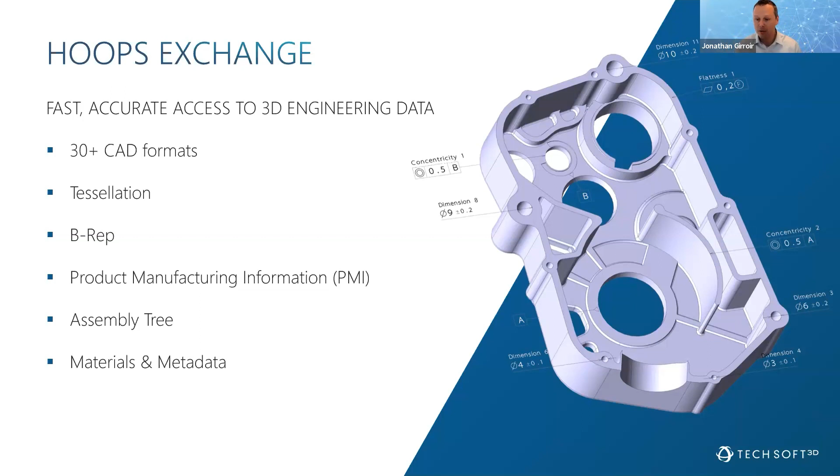So let's dig into that a little bit more, and first talk about what we support when it comes to bringing CAD data into your application. Because now more than ever, if you're providing a solution for 3D printing, your users are going to be getting data from a variety of sources. There is a loss of information when it goes to STL, and some problems can be introduced in that translation. So the closer you can get to that original CAD data, the better.

We support over 30 different file formats, particularly in the engineering space - formats like JT and NX from Siemens, CATIA and SolidWorks from Dassault Systèmes, all of your standards like STEP and IGES, as well as some of your visualization standards like GLTF, U3D, OBJ, and of course we have STL in there as well.

The benefit of using an SDK to read data from a variety of sources is, instead of writing these file readers yourself or interfacing with different SDKs or APIs from different vendors, you really only need to create an integration with one API. So you're creating an integration between your application and Hoops Exchange, and you get all of this data all at once - it's a many to one. You don't have to maintain relationships with other APIs to get the data, nor do you need a copy of, say, CATIA or SolidWorks on your user's machine driving that reader out of that application.

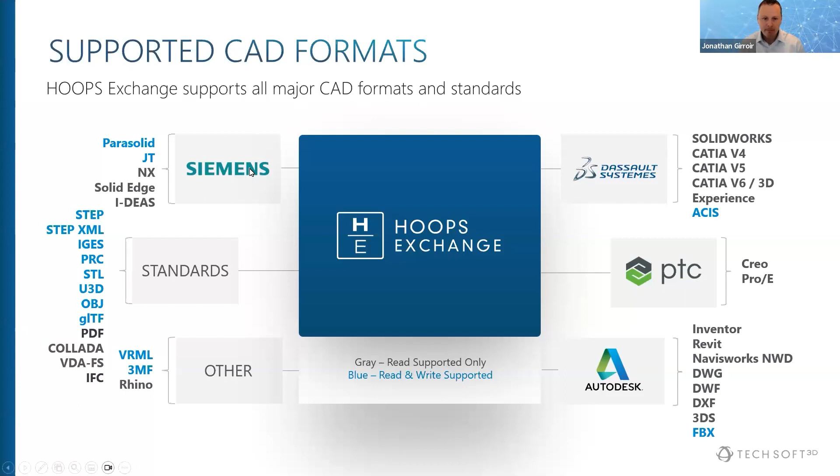So let's dig into some of the different things we provide, particularly for 3D printing. The first is tessellation - many of our workflows are still optimized for triangles. Many of these file formats you just saw have the triangle representation embedded in them, so we can quickly read the triangle data from these different file formats and be able to provide that to you for both visualization and then eventually for outputting to the printer.

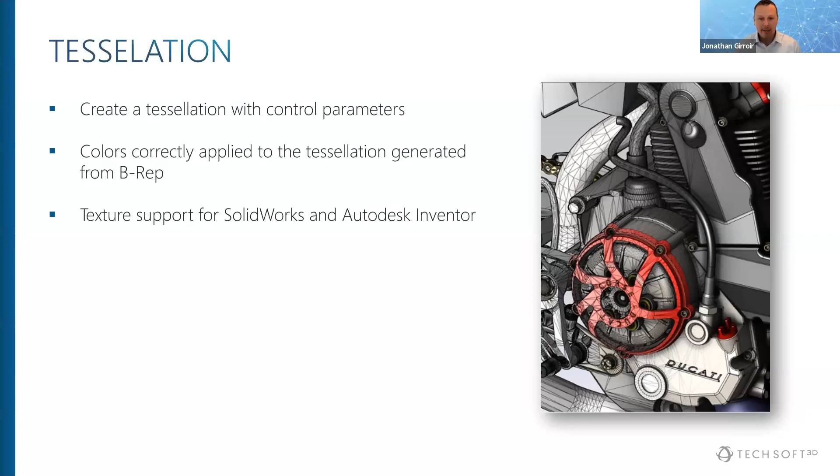However, if there is boundary representation or BREP data available - the mathematical representation of these surfaces - we're able to retessellate either at a much higher level, so you get a much closer tessellation to the surfaces, or at a lower level if you want to simplify the model. We also push to applications like Polygonica that can further help you simplify, fix, and heal your model as well - we'll be talking about that in a minute. As part of this tessellation, we provide a number of other control parameters that allow you to create tessellation specific to your workflow.

We did talk about BREP. So even though many of our workflows are optimized right now for triangles, the future of what we're seeing software being developed for is looking at these actual mathematical surfaces, the BREP surfaces themselves, and being able to print directly from them. Having access to those arcs, curved surfaces, cylinders, cones, spherical surfaces - people are able now to make use of that and make manufacturing decisions off of it. So we do also provide that as part of the API if it's part of the file, from many of these modern CAD files from major vendors like PTC and Dassault.

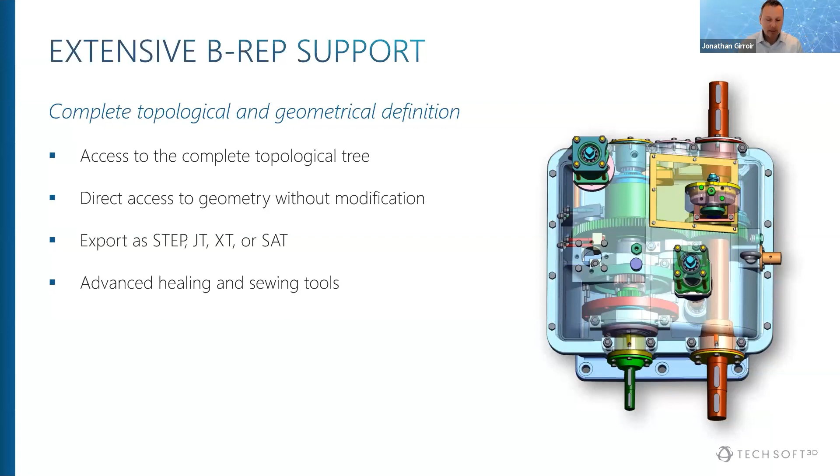They provide this data to you. The other part of this is not just providing the triangles, but the BREP, but also all the manufacturing information around the parts as well. When an engineer actually designs a part, they're embedding additional geometric dimensioning and tolerances, or product manufacturing information.

And if we can't, then we have to go back and talk to the design intent, talk to the designer to see if that is actually going to invalidate the part, or it might require us choosing a different method of manufacturing, either a different printer itself with a higher level of accuracy, or some post-processing milling. I think Elad is going to talk about that a little bit - we'll see from his demonstration.

But all of this product manufacturing information, this GD&T, it's available both in a visual form. So here it's rendered for you, so you can visually interpret it and make decisions from it. Or you can even interrogate the data structures in what we call not visual PMI, but semantic PMI. That is a set of data structures that you can query within your application and then make automated, or let's say intelligent and guided, business manufacturing decisions.

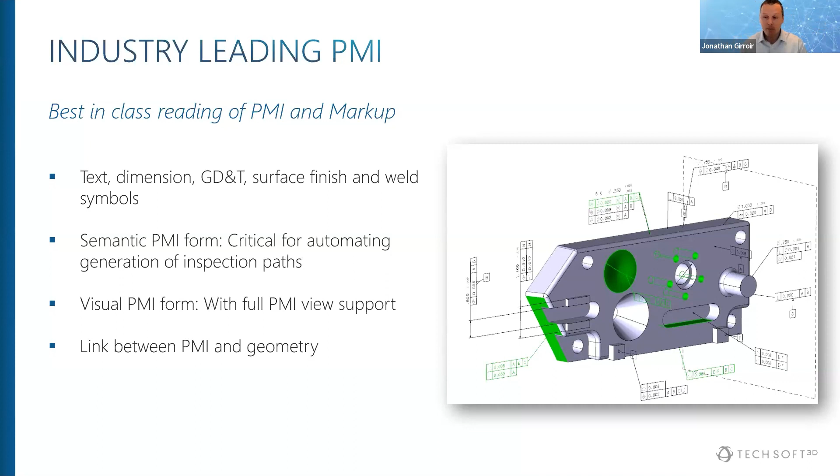Many of these parts that are being built, they aren't just being used by themselves, but they're part of a much larger assembly. And so being able to provide access to that in an intelligent way is really important. How does this part fit in within a much larger assembly? Through the API, we can give you access to that.

How is it instanced? Are there different configurations where parts are swapped in and out? If it's a very large assembly, can we just load the assembly information without loading every single part - giving you all the BREP or all the tessellation - in what we call a shattered mode or a delayed mode, where you just get the assembly, and can request information now for just one particular part. So you get a lot of control over how you load the data within your application as well.

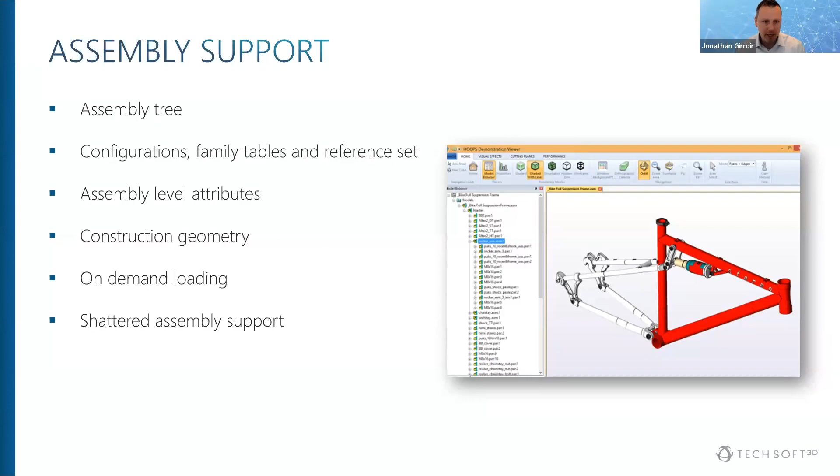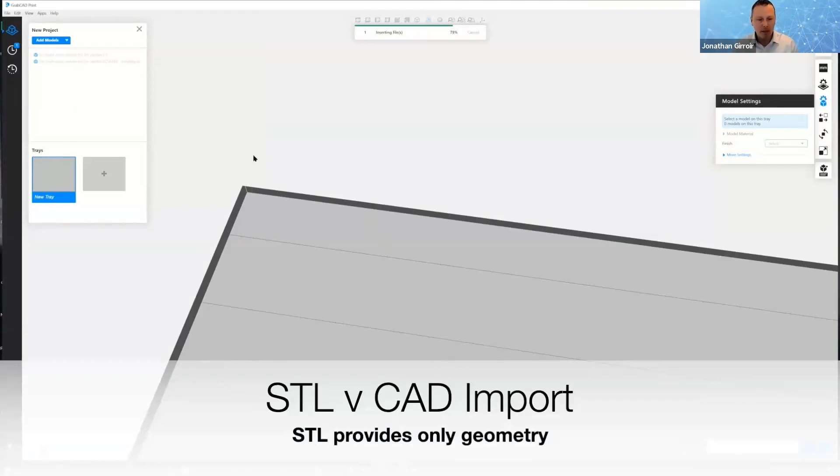So an example of this: here is an application, GrabCAD Print, where you're going to see an example of loading an STL file, as well as loading a SolidWorks assembly of several parts. This is an earbud assembly, like a Bluetooth earbud assembly. And so it's loading both of those files.

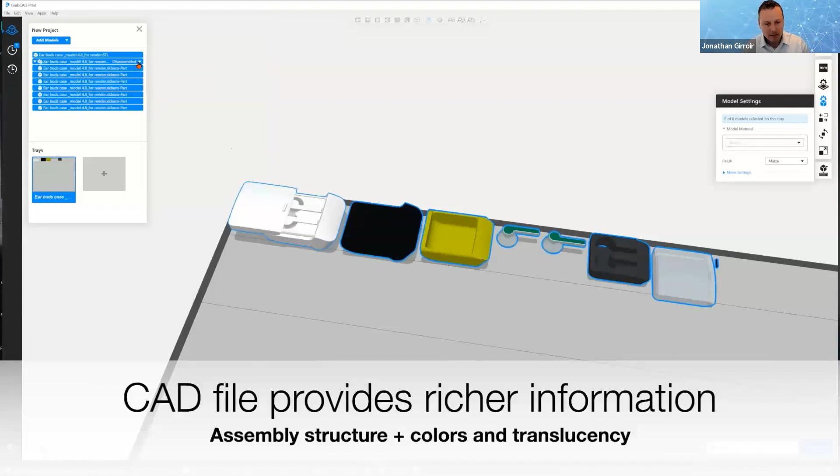You can see in the left-hand corner of our build plane, the STL file, which is really just a collection of triangles, as well as the disassembled and now reassembled SolidWorks assembly here on the right. One thing you'll notice is that there's no material information here in the STL file, but we're able to extract that from the SolidWorks assembly.

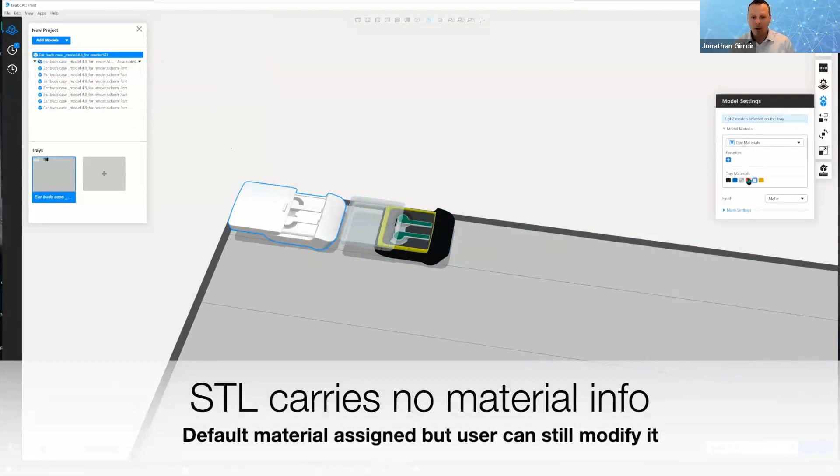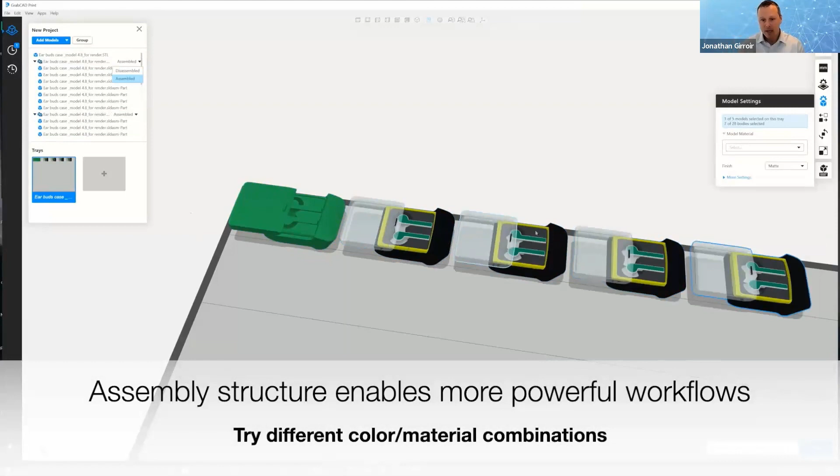It's also just a collection of triangles, and when we try to apply a color to that - let's say another material we want to print in - that's a real advantage of this application, being able to print in different materials and a large number of colors that are selectable. We can only apply it to the entire model, not an individual part. But the SolidWorks assembly maintains the integrity of each of those parts in different space, and it allows us now to instance it - in this case, select a particular part, and then apply a specific color to that.

So this is really two of the different parts of HOOPS Exchange we're seeing - well, many we're seeing integrated here: assembly navigation, we're seeing material information being loaded. We're also seeing the tessellated data coming from the SolidWorks file.

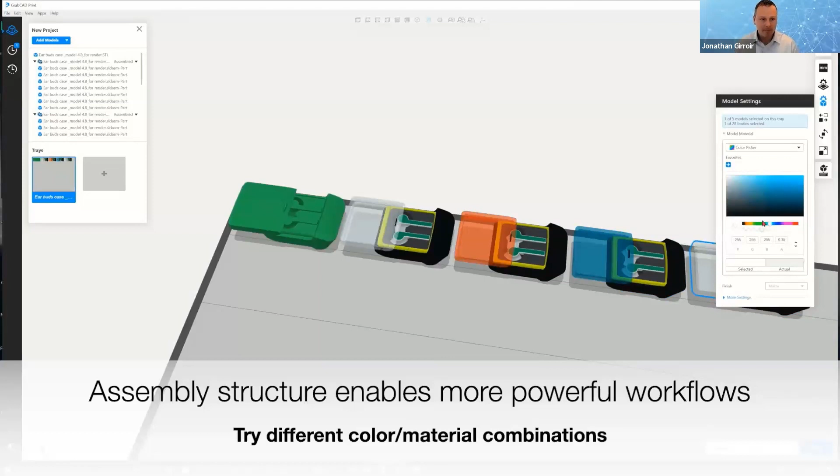So we've been focusing on just Hoops Exchange. That's our SDK for reading CAD data into your application. It's part of a much larger suite of tools at TechSoft called the Hoops platform.

Many times you don't want to just load data, but you want to be able to see it. So there's a direct integration with two of our graphics engines, Hoops Visualize for desktop graphics and for mobile, even AR and VR, or Hoops Communicator.

This is graphics for the web, so we're able to render data loaded from Hoops Exchange into any modern browser. And then we also have Hoops Publish, which allows you to create intelligent reports in the way of 3D PDF, one of the primary outputs of Hoops Publish, as well as 3MF and standalone HTML.

So this is the Hoops platform. Again, we're focusing mainly on Hoops Exchange today, bringing data into your application and then fixing it with Polygonica, which we'll see in just a minute.

But then another area where we see a lot of interest and application in 3D printing is that of simulation and analysis. I did want to talk briefly about a very common workflow that we see, and some other toolkits here at TechSoft under the CEETRON platform, another product line we have.

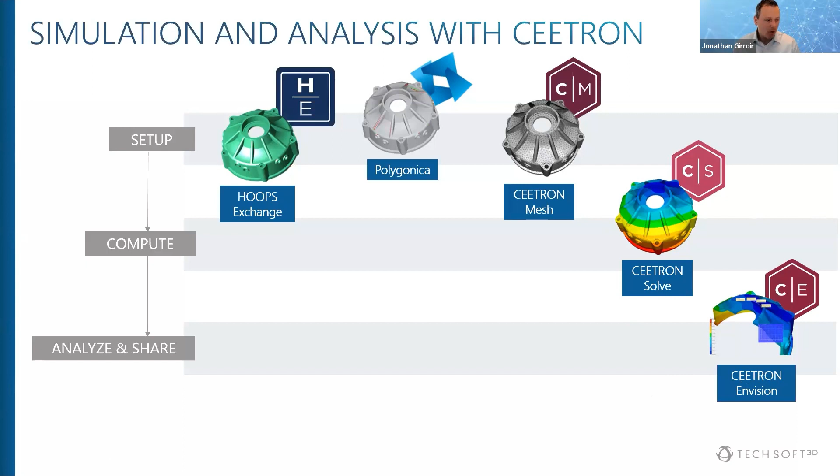We're seeing more and more of simulation and analysis in 3D printing. It's an exciting space right now for us because we want to be able to not have to design parts that fail. We want to take all that we learned from the subtractive space and be able to apply it here in the additive space.

And this has been part of the product life cycle for many years, where before we even build something, we make sure that it's going to fulfill our needs.

All right, lastly, we have Hoops Exchange and Polygonica. We saw that on the last slide. Hoops Exchange does have an integration by way of sample code with Polygonica. Richard's going to talk about that and how Polygonica is used to heal and Boolean parts together and really prepare your model for 3D printing.

But we do have some sample code that allows you to integrate these two very quickly and get working, passing data from Hoops Exchange to Polygonica and back. I'm more than happy to work with you if that interests you and you're interested in these two toolkits.

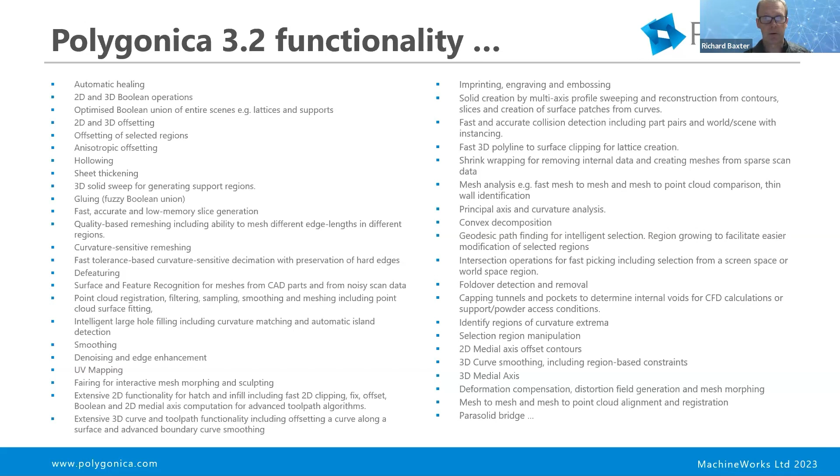Where did Polygonica come from? Well, we didn't come from additive manufacturing. Our involvement and focus on additive manufacturing is kind of a coincidence or an accident. We're actually from the subtractive industry originally.

So the company's name is MachineWorks, and MachineWorks is a software component for CNC material removal. We started developing that in 1994. The company's based in Sheffield in the UK. Everyone comes into the offices where I am now in the picture.

In 2014, we were acquired by Heidenhain. Heidenhain is a very large German manufacturing company. They make a whole bunch of things, but specifically CNC - they're one of the leading manufacturers of CNC controllers. So they acquired the company to put MachineWorks libraries on every controller that they sell. And actually now they also add Polygonica and use it for some functions in their controllers also.

Just a quick word about MachineWorks. At the heart of MachineWorks is a very fast polygonal BREP Boolean engine. What I mean by BREP is boundary representation - we have a boundary that encloses solid material, and that boundary has connected faces. The difference with the CAD engine is that those faces are planar polygons. That's the primary difference, and they're planar polygons because it's way faster, and it needs to be faster to meet the demands of the subtractive industry, CNC material simulation.

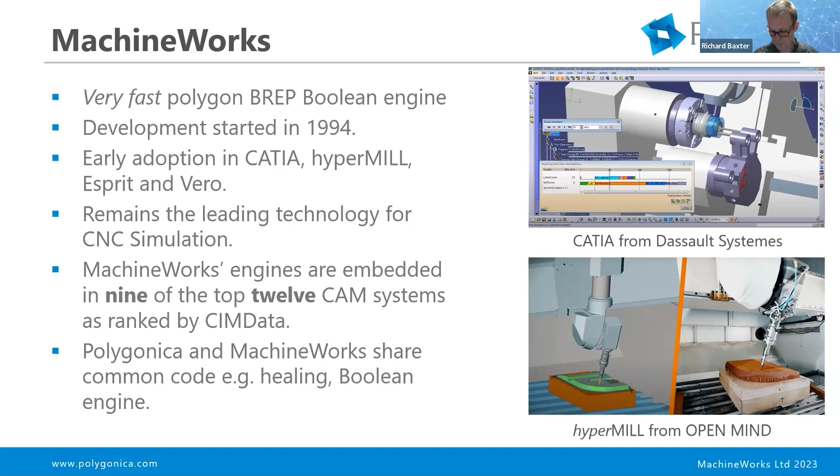That was started in 1994. It's now 2023, so nearly 30 years, and MachineWorks remains the primary engine in use in that industry. But the point about mentioning all this is that Polygonica and MachineWorks share the same code base. So the healing and Boolean engine in Polygonica comes from MachineWorks, and some of the newer algorithms we're developing for Polygonica are going back into MachineWorks. So there's a synergy between the two products there.

And these are some of our software customers that use MachineWorks - Dassault, Autodesk, the large number of CAM brands that are owned by Hexagon Manufacturing Intelligence. Similarly, Sandvik, who owns Cimatron, GibbsCAM, iCAM, etc. And on the hardware side, there's a large number of major machine tool manufacturers who develop their own software to go alongside their machine tools - companies like DMG, Mori, Okuma, and Makino all use MachineWorks.

On the Polygonica side, about 50% of our customer base is additive. So we've got Oqton, 3D Systems - so 3D Sprint, 3DXpert - using Polygonica, Stratasys, GrabCAD Print, as Jonathan's mentioned. The whole suite of products provided by Desktop Metal, and that includes now EnvisionTech, or eTech as they're now known, and their factory software - that's all based on or uses Polygonica. Castor, who Elad is going to talk to you about in a moment, Velo 3D, Intech Additive, Nexa3D, Zortrax, and also CADS Additive, which makes a product called AM Studio, developed in conjunction with SLM and now an independent product, resold by Hexagon and quite a number of other companies.

And on the CAE side, also worth mentioning, ANSYS uses Polygonica in quite a number of their software solutions. So within additive manufacturing, I split the usage up into three or four categories, if you count CAE.

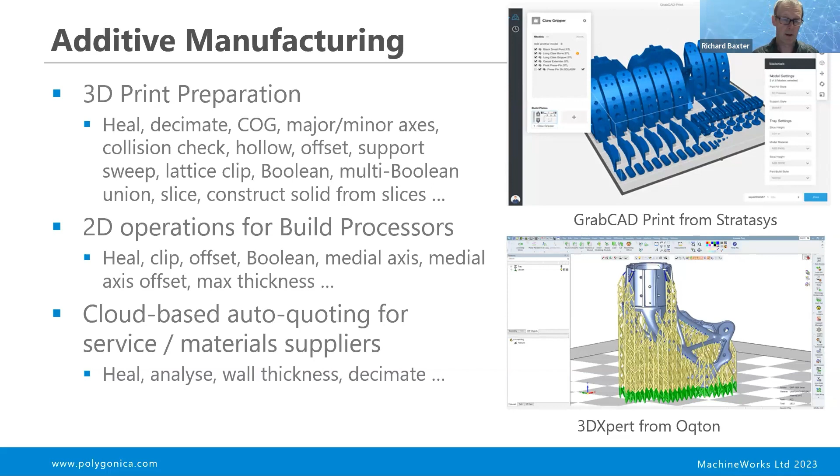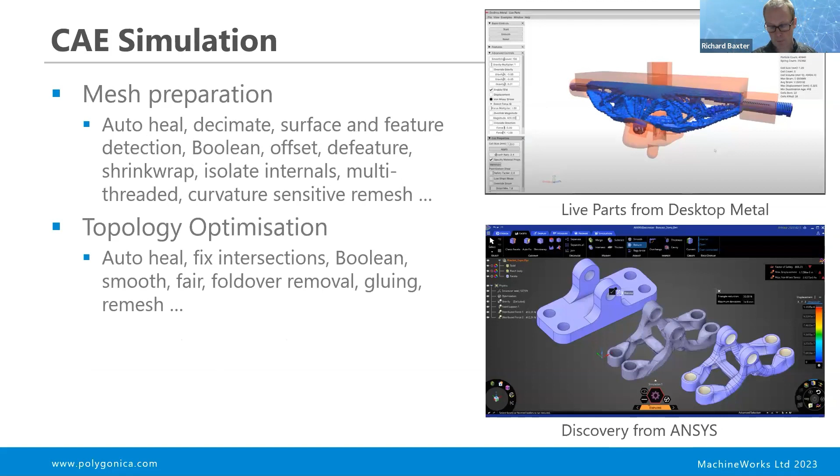And finally, Polygonica is used by CAE simulation vendors, including ANSYS. This is becoming increasingly important in 3D printing and additive manufacturing, and it's typically used for preparing the mesh prior to CAE remeshing, and sometimes for post-processing after topology optimization or types of generative design, etc.

Okay, so I'm now going to move on to the demo. This GUI is called Polygonica Demo, but it's not available—we don't give it to anybody, we don't sell it. It's just a demo program, but it gives you a nice overview of what you can do with Polygonica.

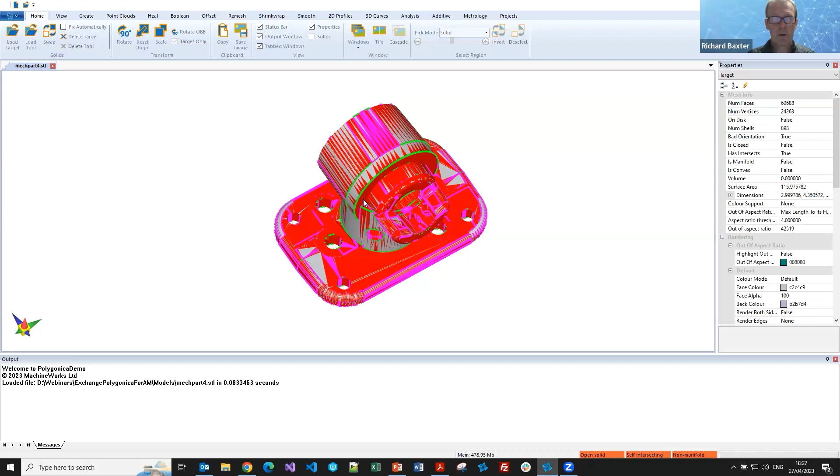So I've loaded in a small STL. At the top right here, it's 60,000 faces. These traffic lights are telling us it's not watertight, it's got self-intersections, it's not manifold. Red is self-intersecting, green is open edges—an edge with only a single face attached instead of two—and purple in Polygonica language is non-manifold, meaning an edge with three or more faces attached.

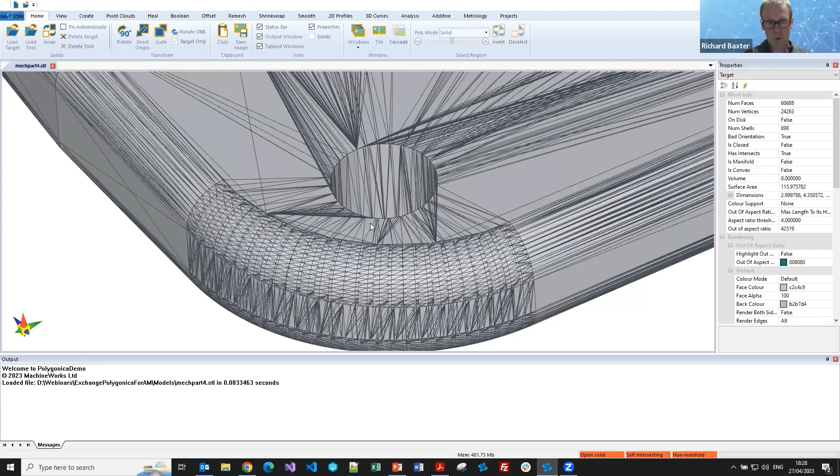If I just turn off that error display and show you the mesh, you can see what's happened here. We've got, it's a bit weird, but we've got a sort of double mesh, two meshes sitting on top of each other, and at the blend here, one's poking through the other. So clearly a bad state of affairs and not usable.

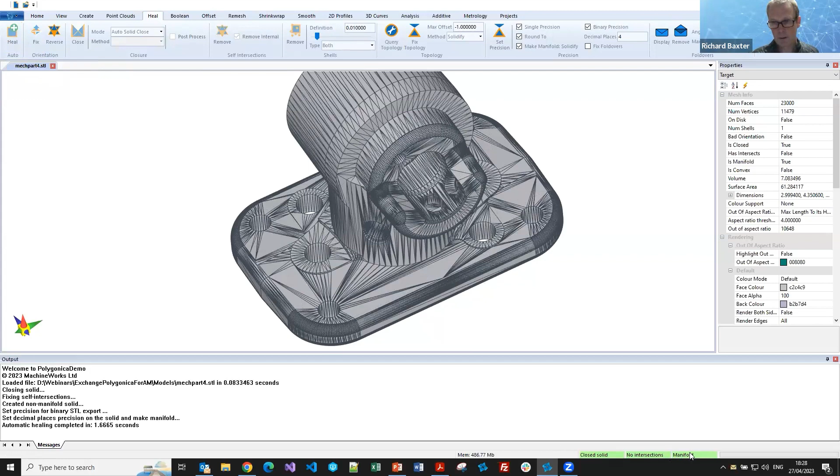So I'll click the healing tab. Polygonica's got a whole ton of healing functionality I'm not going to talk about in this webinar, but I'm just going to click the automatic heal function, and bang—1.6 seconds—everything's green, and we've got a nice closed watertight manifold result that you can then throw into your slicer or whatever.

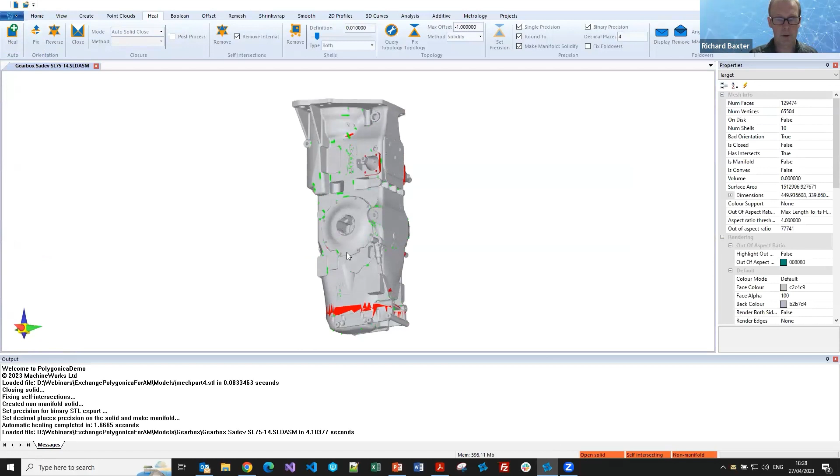But we're talking here about Exchange, so let's load in an actual CAD part. This is a SolidWorks assembly, and I'm going to load it into this demo using the Exchange Polygonica bridge code that Jonathan was talking about. That code is tessellating it, converting the tessellations to Polygonica, and in this demo I've just thrown all those parts together—I haven't kept the assembly structure, I've just thrown it all into one single STL bucket, if you like.

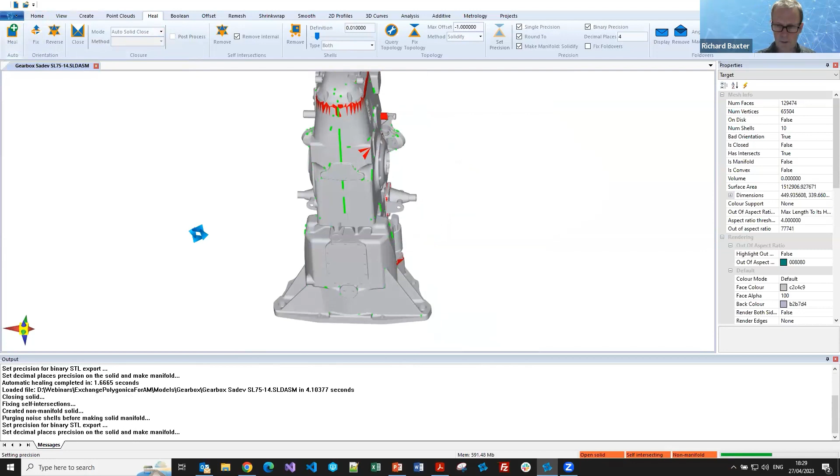So there are obviously going to be mesh errors. I'll click healing and let Polygonica heal that—that's going to take hopefully about 10 seconds. Just a word, I'm running this on a 4-year-old Core i7 laptop, so it's probably not even a mid-range gaming machine these days. There's no special hardware here.

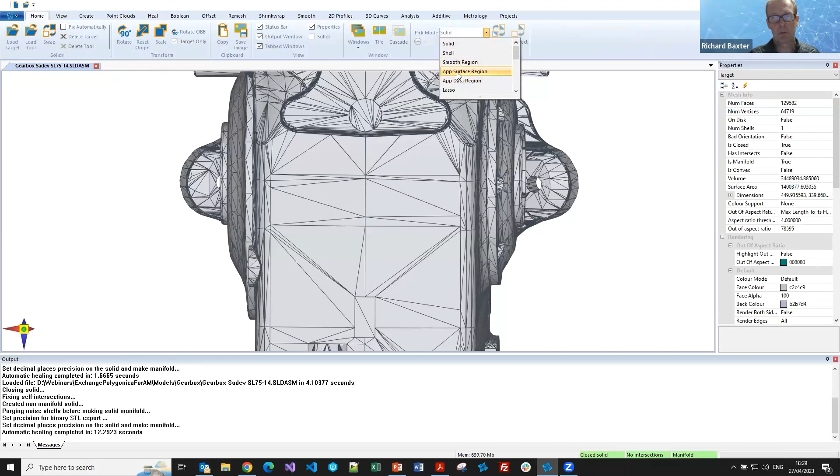Okay, so I'm showing the facets. One nice thing that the Exchange Bridge has done for me is it's kept pointers back to the original BREPs in the Exchange database, BREP patches in the Exchange database. That means I can select them—I select a triangle, then go back to Exchange and say, tell me the triangles in this BREP patch, and I can do that here and here and here. So that's a nice thing. And then what else can we do with these?

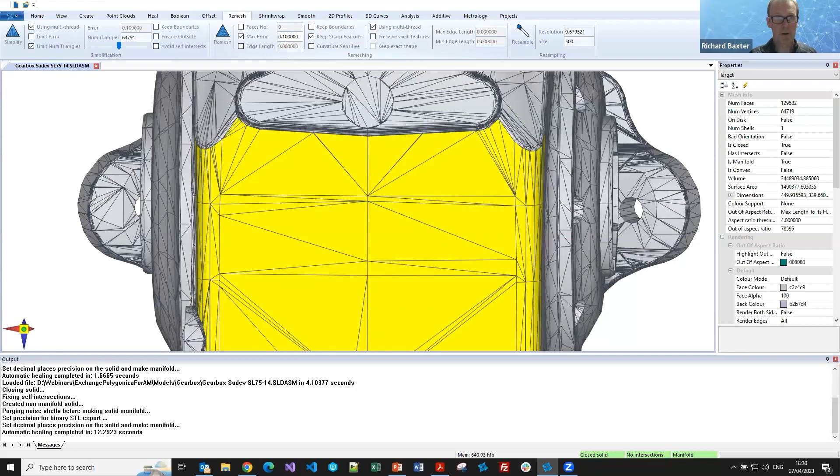Well, let's try remeshing them. How about that? So we'll just do a local remeshing of these 4 selected BREP faces.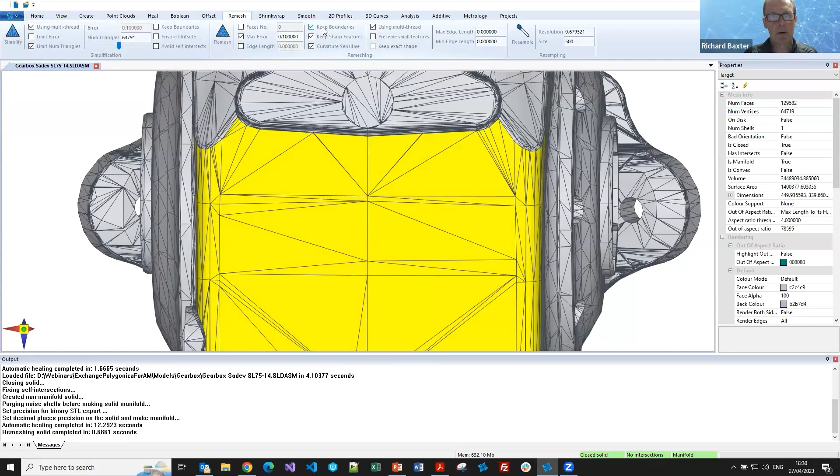There we go. There's a nice remeshing, but you can see we've lost the boundaries between those BREP faces. So I'm going to undo that and select the faces again, so I don't remesh the whole model like I did last time, and this time click Keep Boundaries. So it's just remeshing those 4 BREPs, but you can see now there's a nice clean boundary there, and there, and there, and that's all because we've kept the structure provided to us by the Exchange bridge, even though this is a dumb polygon mesh. So that's really neat.

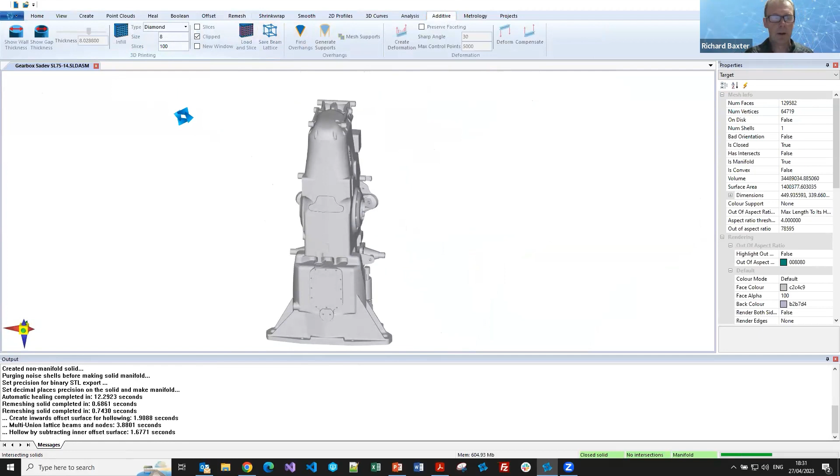But what we're doing is additive here, so let's hollow this thing out and add a lattice. I'll just click that and get that going. This is doing a whole bunch of Polygonica operations under the hood: it's offsetting the whole model inwards, then doing a Boolean subtraction to create the hollowed model, then creating a bunch of cylinders and spheres to represent the beams and nodes of the lattice. Then it's throwing everything into one big multi-Boolean operation, like a scene-based Boolean, so you just throw thousands of parts at it and do all the Booleans in one go in an optimized way. At the end of it, we get a hollowed out part.

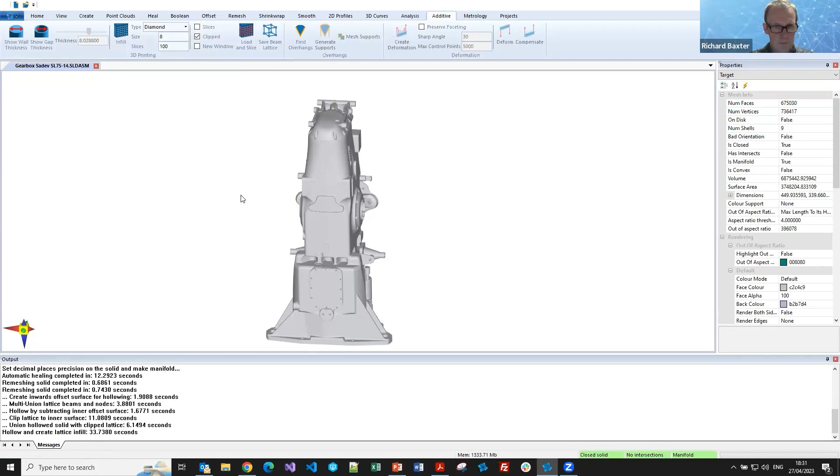And it's explicit geometry, so if you want to pass this to a CAE remesher or something like that, you can do—all the joins, all the intersections have been evaluated. And it's done that in 33 seconds. If I just make that transparent, we can see the lattice inside it. And I'll just clip it.

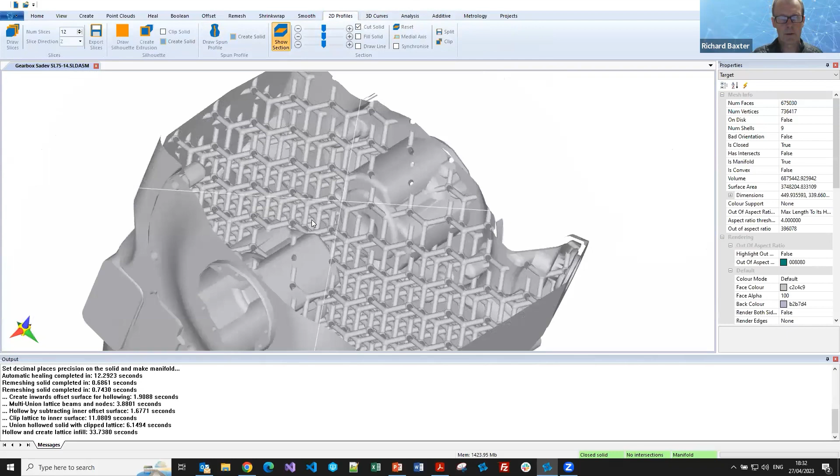So where are we, 2D profiles. There we go. I'll just do a section plane through it so we can see the inside a bit better. You see there's a lattice, and it's done that all nice and quickly—you've got a lattice through there. And if I click fill solid on, you can see there's also the hollowed out bit.

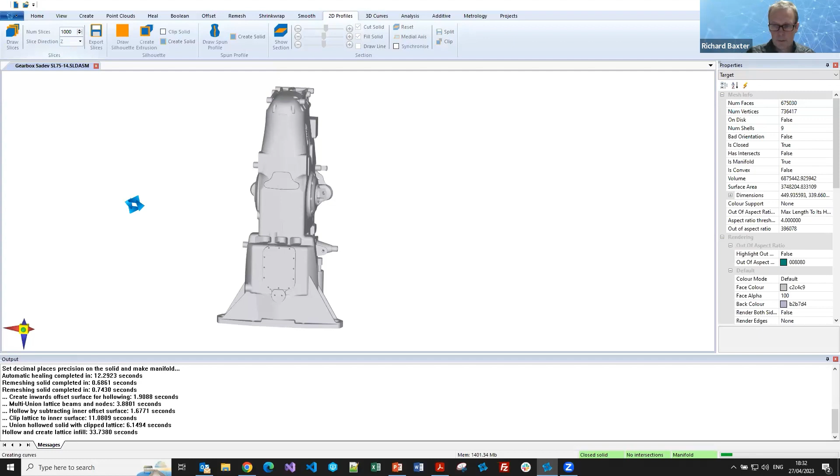So finally, we'll slice this. Let's do 1,000 slices in Z. Again, Polygonica's got pretty advanced slicing—if you've got printers with high tolerances, large print areas, Polygonica slicing is going to work for you. It's been optimized for that kind of stuff. And there we go, it's done that in 4.3 seconds.

And again, if I show a section through, you'll see it's also sectioned all that lattice—it's sliced all that lattice stuff on the inside.

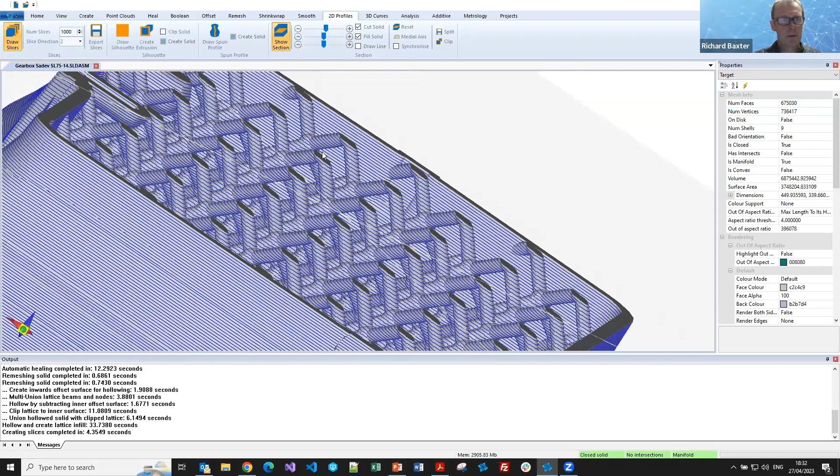So I'm going to load in a 3MF part now. Polygonica doesn't support 3MF loading natively, but we do provide some example code that reads and writes to 3MF, so you can make use of that. What's interesting about this part is it uses the 3MF beam lattice extension, so it defines beams and nodes in parametric form.

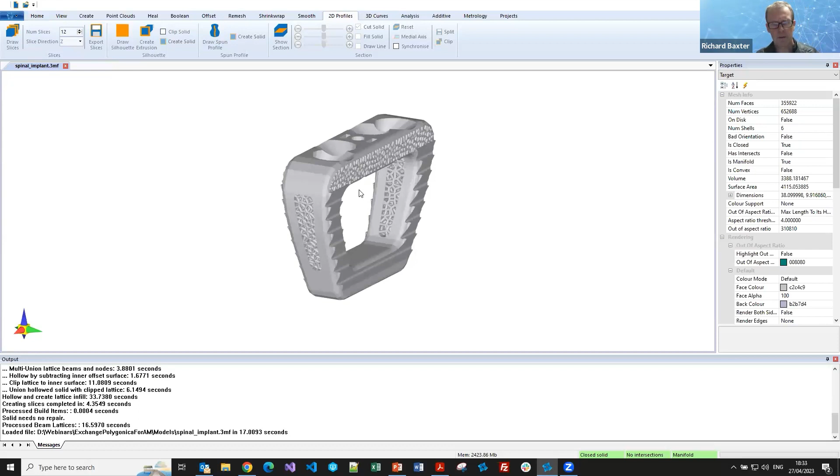What we're doing when loading it in here is actually instantiating all those as meshes, and then doing a massive Boolean union of all the instantiated beams and nodes with the mesh geometry in the 3MF file, creating the final explicit geometry of the part while loading it. It did that in 17 seconds. This part actually has 32,000 beams in it, which I had to double check because I didn't believe it when I first saw it.

But it's a tiny 3MF file because all the beams are just represented as start and end points and radius of cylinders, etc. But you can see Polygonica has created the explicit mesh geometry from that really quickly.

But we can also do another variant of the same kind of thing. We'll load this 3MF file in, and then we're going to slice it. So instead of doing a 3D Boolean union to create all that explicit geometry, what we'll do is slice it all as its separate components, and then do all those unions in 2D, so we'll just get the final slices rather than having to create the full 3D instantiation of the object.

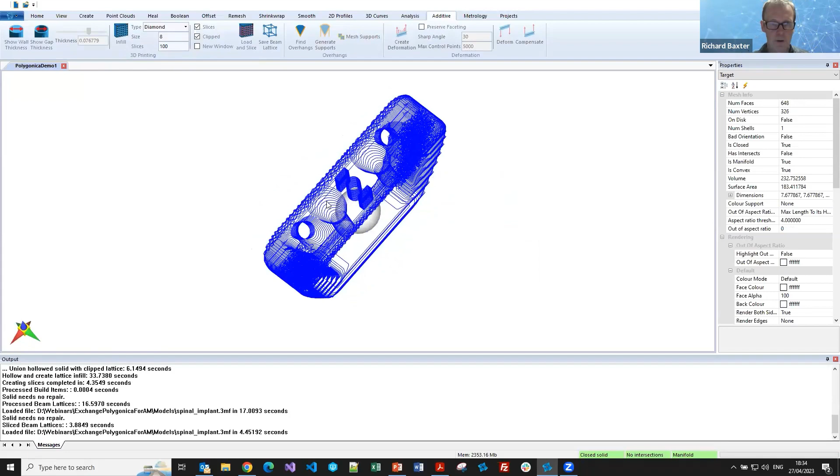And there you can see, that did that in 4.5 seconds. I've only created 100 slices here—it would obviously be slower if you created a reasonable amount of slices, but you can see that's done really quickly.

Okay, next one, I'm going to load a Creo part. This is again loading in through Exchange.

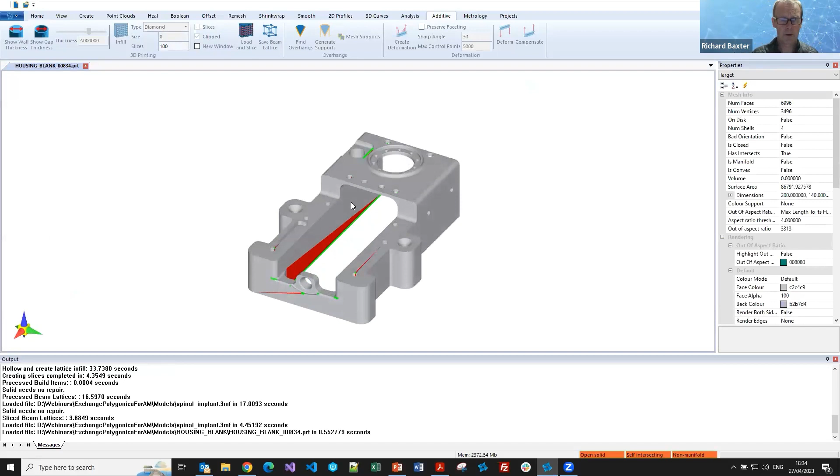Now you can see there are some mesh errors here. We're just using the default Exchange tessellation for visualization. Exchange has an accurate tessellation that produces watertight models, but I want to show Polygonica healing, so I'm not using that. So we can fix that - bang, that's nice and fixed.

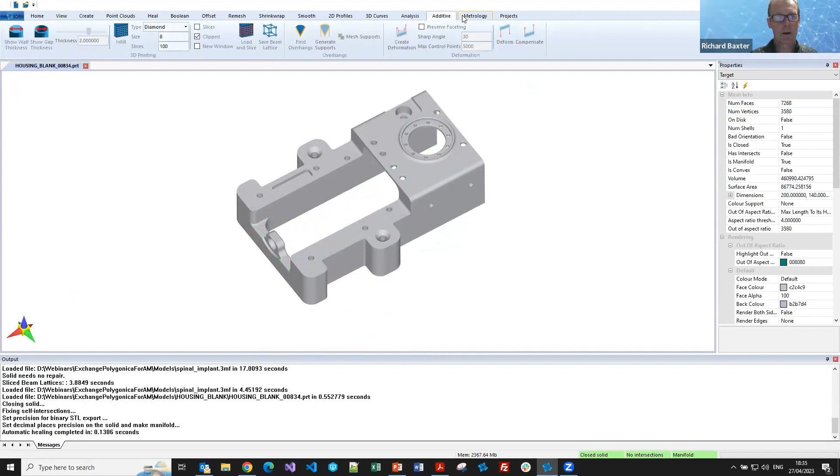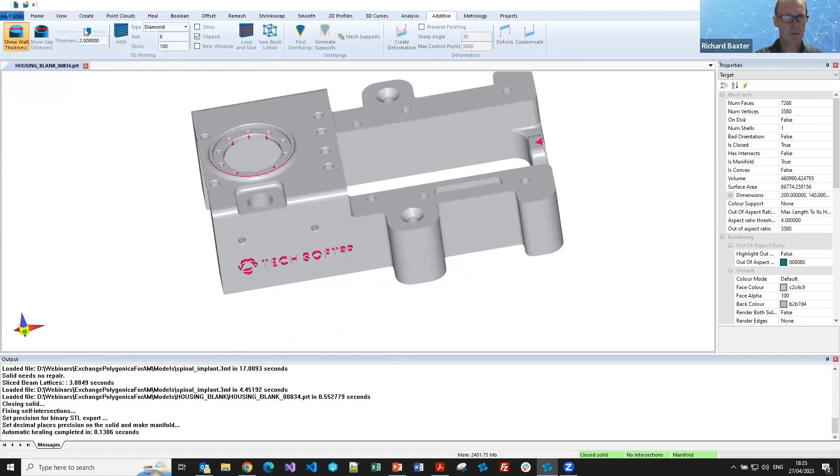Let's look at some wall thickness analysis. So show wall thickness. Polygonica is basically doing an even sampling of points across the surface of the mesh, so it's independent of the mesh tessellation. Then it's measuring the thickness of all of those and coloring them based on a threshold. If I drag this slider up and down, I get more or less areas where it deems the walls are too thin. So that's probably about right. This lettering is obviously too thin for the printer, etc.

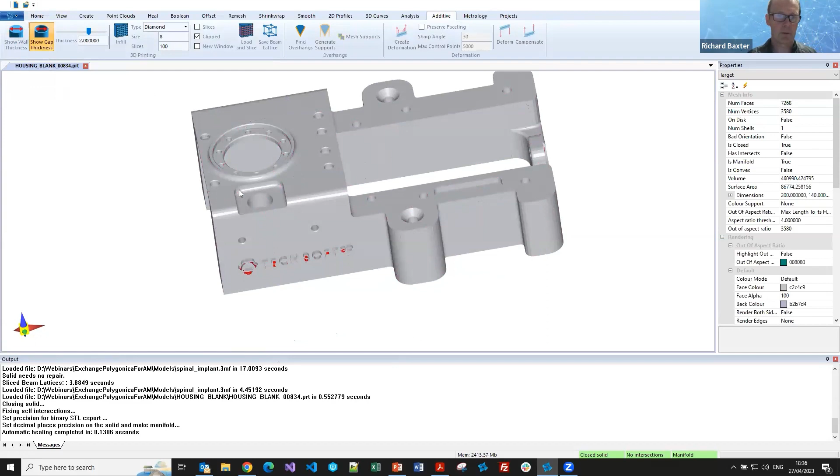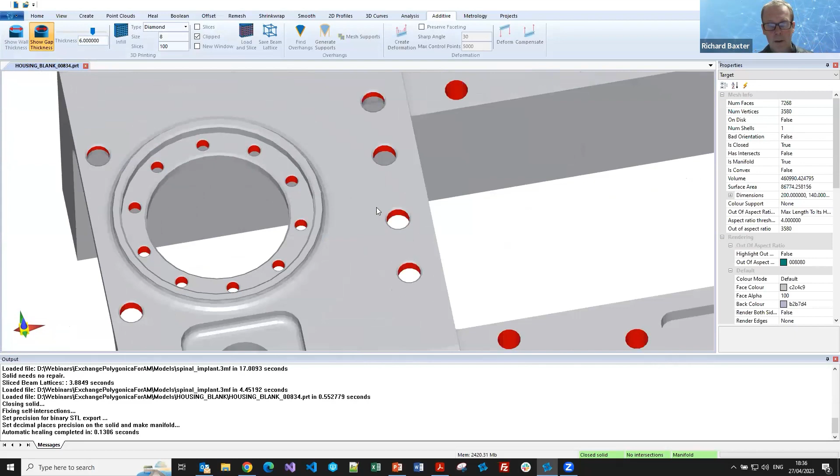We're also about to release gap thickness, which is a similar principle, but it's actually measuring the gaps between faces as opposed to the thickness of the solid material. So in this case, if I make that 3, then we can see these holes are obviously below - the diameter is less than 3. If I make it 6, then more of these holes are less than 6. And just to show off, I'll make it a bit bigger, and we can see that this pocket's width falls below the 12 threshold. So useful printability analysis functionality there.

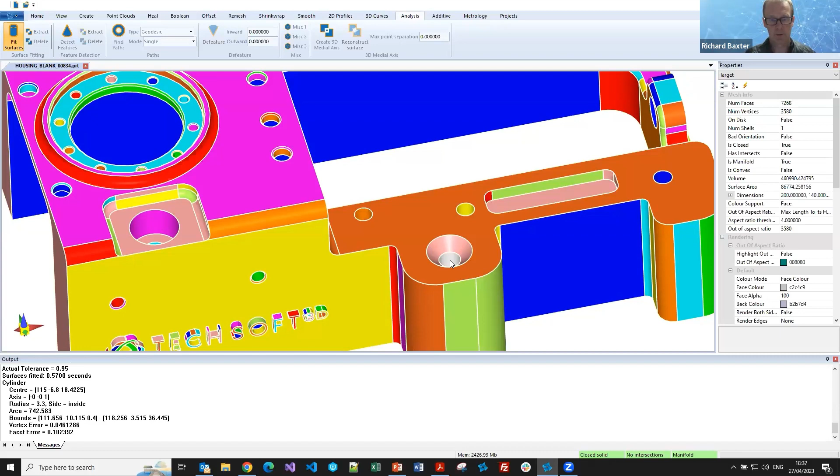And we've also got surface fitting and feature detection. Surface fitting is the idea that we do a best fit of portions of canonical surfaces like spheres, cylinders, cones, toruses onto the surface to give you analytic information. For example, if I double click this, I've got a cylinder, so I know the center and axis of the cylinder. Now, obviously, if your data has come from a CAD model via Exchange, that's pretty pointless because you can get that information really accurately via Exchange. But if somebody's giving you an STL file and you need to reverse engineer it, then this information can be useful.

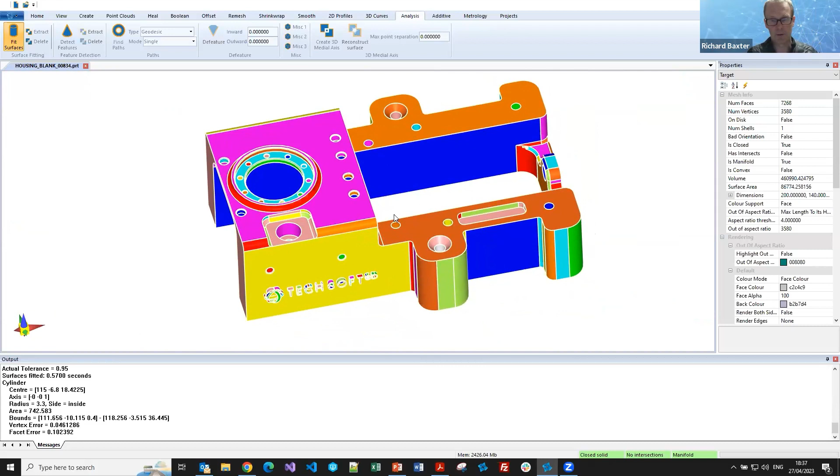I will say, though, that if you've got freeform surfaces, this is not going to do a great job, because you'll be trying to fit portions of cylinders. It's not going to automatically fit a NURBS surface to your freeform polygon mesh - it will try to fit cylinders and toruses and things, and you'll end up with lots of tiny surface patches, which won't be very useful. But in terms of finding out what's in a polygon mesh part, it's quite useful stuff. And the other important point is it also works with laser scan data, so it's tolerant of noisy data - it can really help with reverse engineering laser scans.

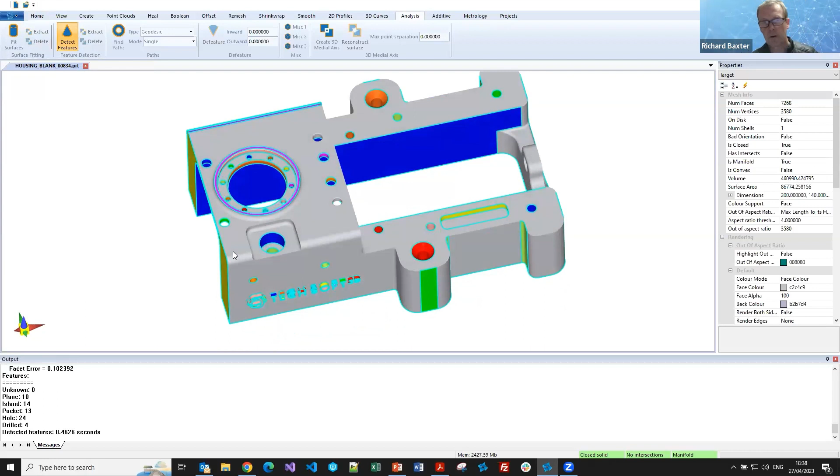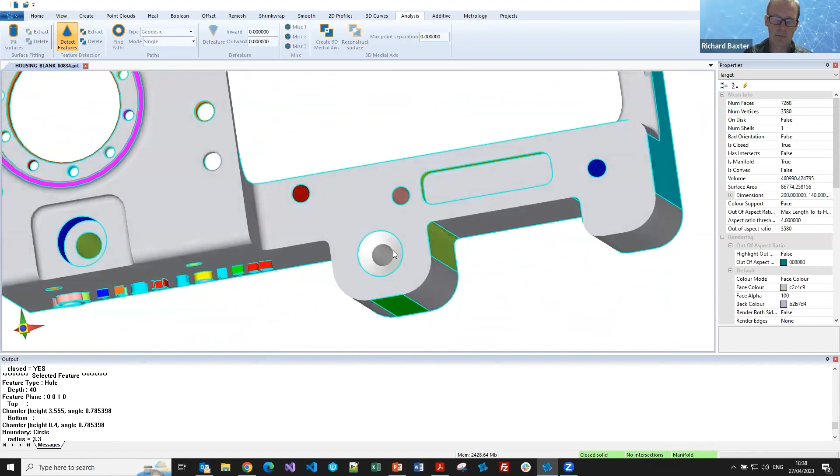We also have feature detection, which was originally put in for 2.5 axis machining, generating CAM cycles from prismatic parts. We do have customers now using it for additive, so we're putting more effort into making it more robust with respect to mesh irregularities. But the main difference with feature detection is it's finding things like - it knows that this, for example, is a pocket, and it knows all the sub-features within the pocket. Similarly, it knows this is a hole, but it knows it's got connected features within that hole, and it knows things like chamfers, radii, fillets, etc. So that's the main usage for that.

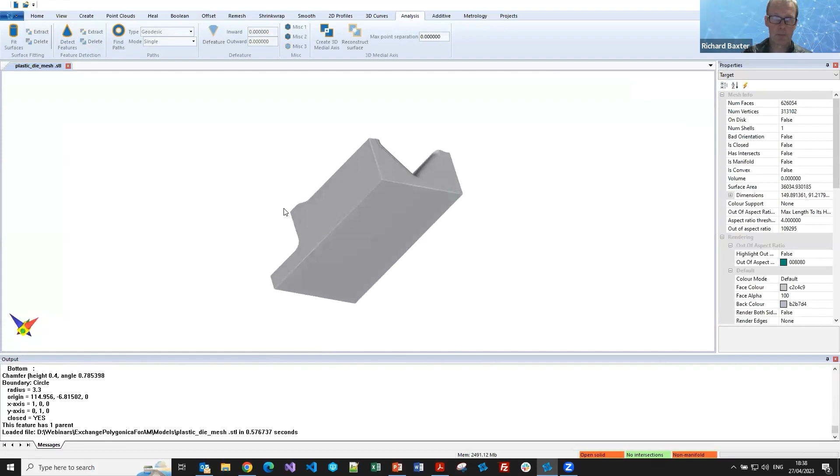So two more quick demos, and then I'll hand over. Simplification is really widely used by our additive print preparation customers. I'm going to show it on a laser scan part simply because it has more impact, but it works perfectly well with CAD parts, very well with CAD parts. Here we've got a typically overfaceted result from a laser scan.

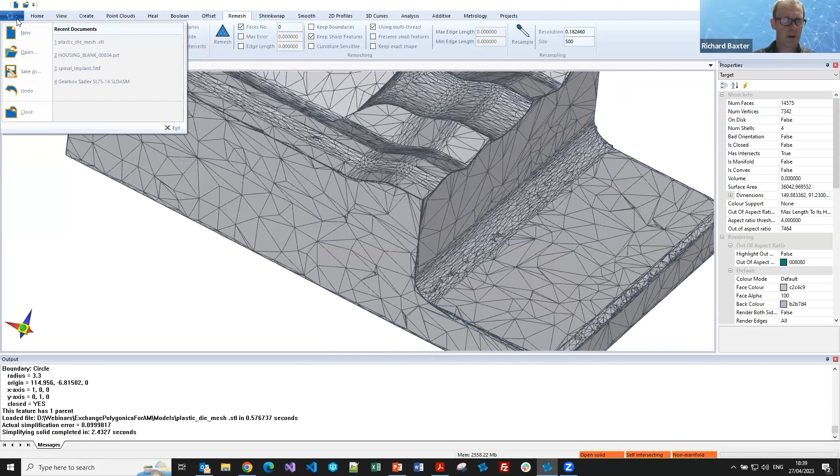If I click, I'm going to simplify it to an error tolerance of 0.1. So what that means is the resultant part will be no more than 0.1 units from the original, and it's done that in 2.4 seconds. It's reduced it to 14,500 polygons - it was originally 600,000. If I just undo that, you can see it was originally 626,000. I'll just do the simplification operation again. So it's very fast, multi-threaded, and gives you a very accurate result so that you know your resultant part is within the tolerance you've told it to be, which is really important.

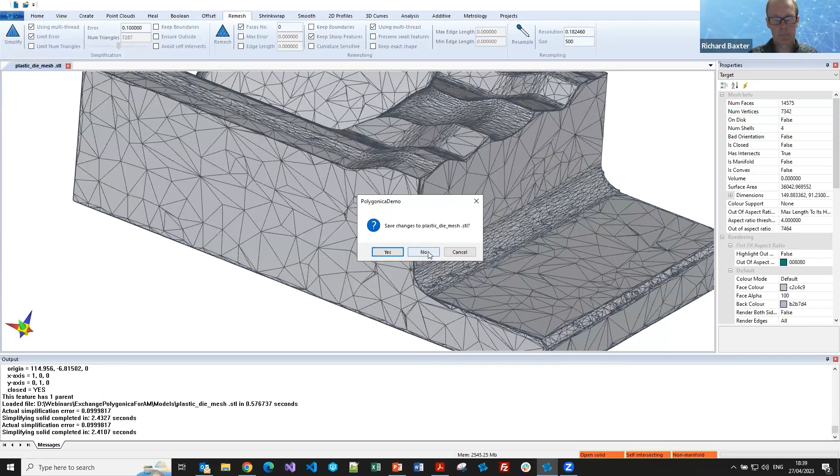Finally, some new functionality we added last year in Polygonica 3.2: mesh deformation compensation for additive manufacturing. I've loaded in two meshes here. The grey mesh is the design part, and the brown mesh is something we've mocked up to simulate something that might have been deformed during the printing process.

So it's drooped in Z, and it's also shifted in XY. I didn't put a very good angle there, but you could possibly see in some of these places that it's actually shifted in XY as well. You could create this deformed, drooped part by doing a laser scan of a printed part, or it could be the results of CAE analysis.

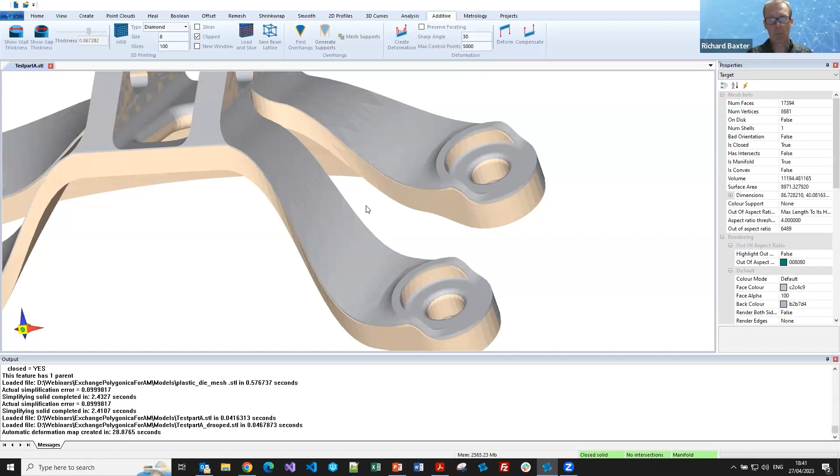What Polygonica has done is take the two parts and compute a deformation field, which is a bunch of control points and a set of vectors with a magnitude and direction, that will allow you to morph one mesh into the other mesh. So if I just look down from above a bit better.

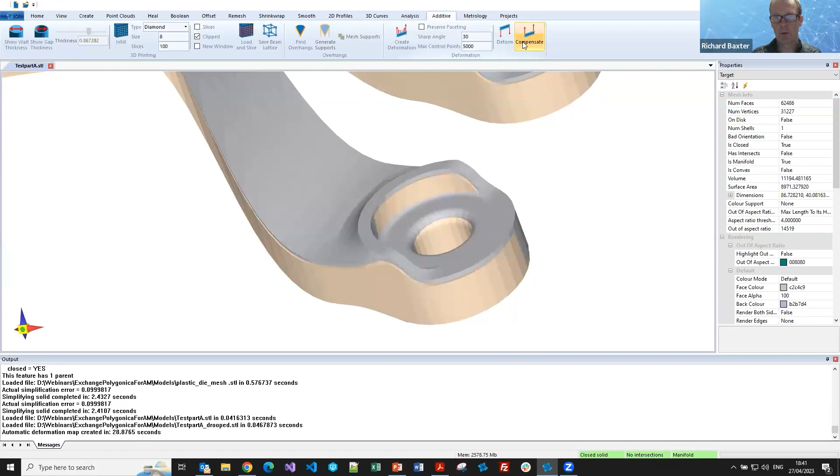Let's look at that bit. If I click deform, that's now applying that deformation vector, and it's moved the gray part onto the brown part. So what you would want to do for compensation is you'd want to go in the reverse direction. In this case, we're using the same vector field, but just applying it in the inverse. You can see that's lifted it off the part and moved it away.

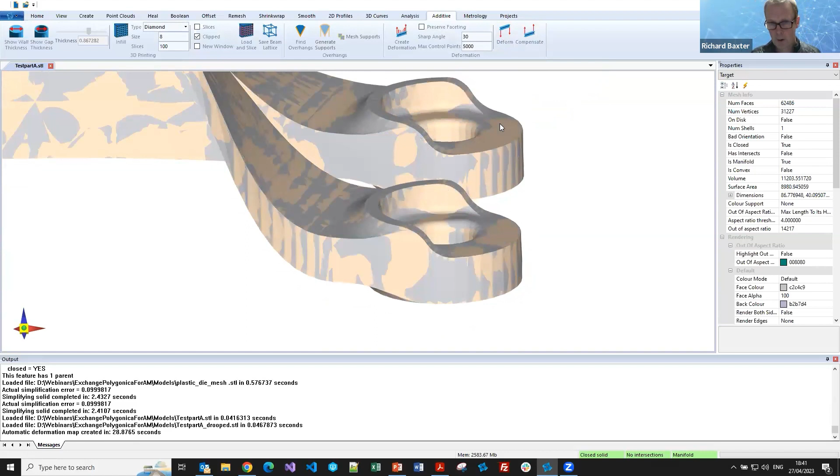So for small deformations, at least, the idea is that when you print it, it will move the part to be in the correct location. You'll get the correct printed part. Okay, so that's the end of my section.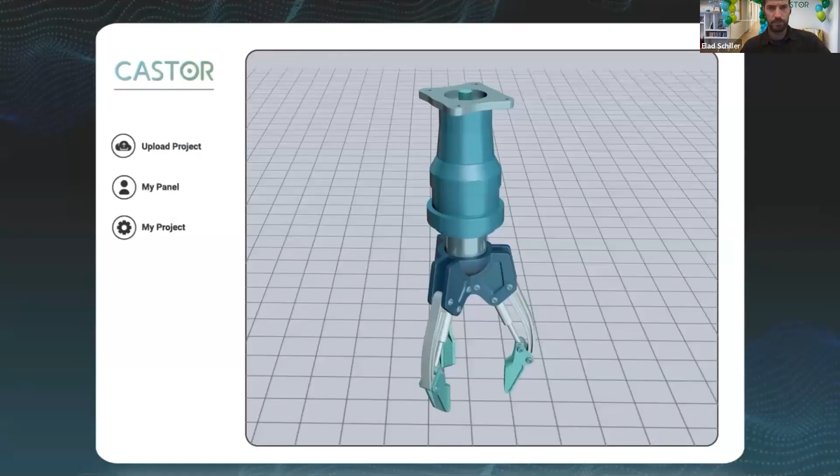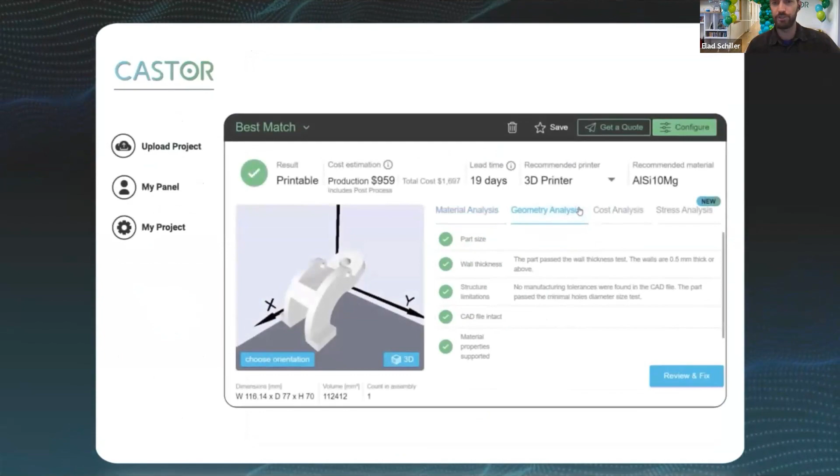So how does it work? Basically, you will upload a full assembly to Castor. We will explode the assembly into the individual parts and give you an assessment on every part. It will be a financial assessment as well as a technical assessment: material, geometry analysis, cost analysis, and in the end we'll also give you a stress analysis that will help you understand if the forces applied will work in an anisotropic material environment.

And the holy grail is to find parts that can be redesigned for additive. There are many companies out there that help in redesign for additive. We are good at finding, out of thousands of parts, those parts that will give the most impact if you decide to go and redesign the part.

One second. So this is one example that I'll give here, and then I'll go to the demo.

This is a part we found for HP. It's part of a huge 2D printer. And what's nice about this example is that we were able to save 75% in cost, due to the fact that these parts were manufactured separately. And when they were manufactured as one piece in additive manufacturing, it gave them many advantages, including cost, weight, and reduced assembly time.

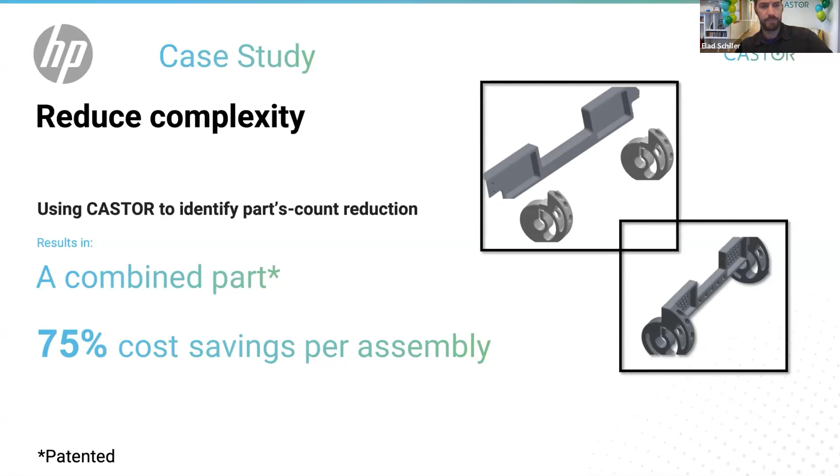So I think I'll dive into the app right now. I'll start by showing the upload page of Castor. This is one of the ways that people use Castor. The other one is via integration—so for instance, if you have Teamcenter, this can all happen automatically, or a different PLM.

Everything can be analyzed according to preset rules. But basically what we need is three inputs: the geometry, the quantity, and the original material you were planning to manufacture the part with.

And I think that in this part, Hoops Exchange is a real game changer, because what we can do is basically take any native 3D CAD file format and we will crunch it. And this is actually true—as of a year and a half ago, I think we have no complaints when it comes to formats. This is a huge win for us.

And not only that, we also are able to extract data from these files that saves the user from bringing extra inputs—PMI data, such as material, machining data, etc. This is priceless for us.

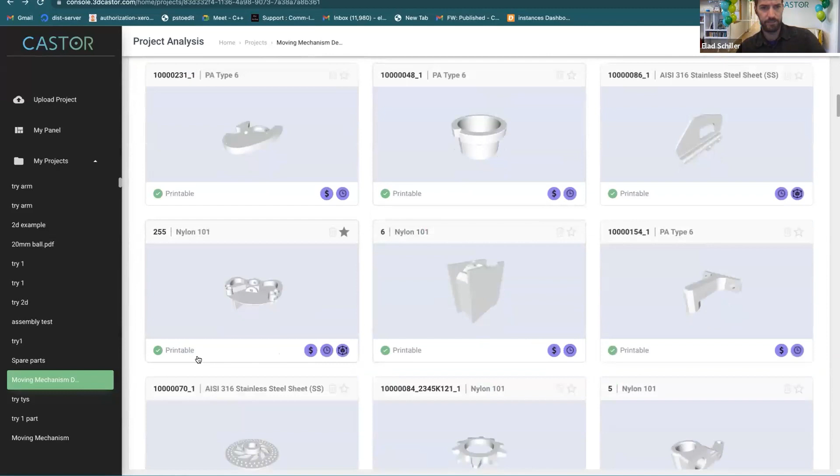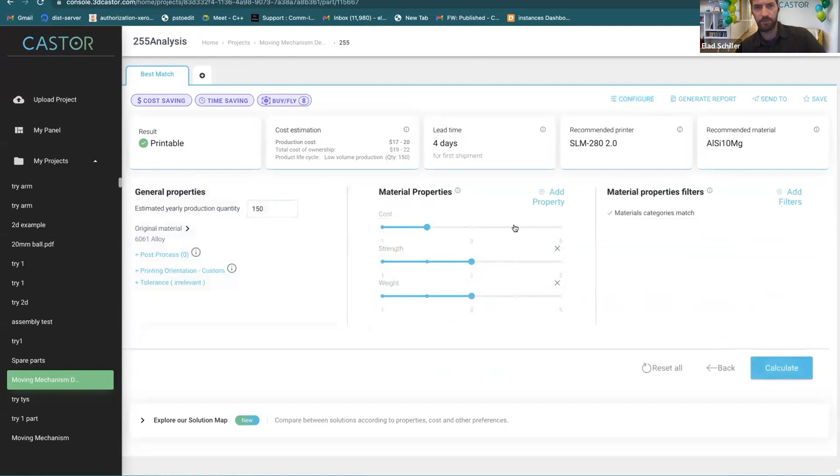I would like to show you how an analysis looks like. So this is an example of a printable part. We will give you the printability, the costs, the lead time, and the technology and material we chose for this example—obviously out of the technology and printer that interests your company or the printer that you have. And also we can take into account what you think: if you want to optimize for cost, you can optimize for cost; if you want to optimize for various material or other properties, you can do that too.

Once we have that, we'll give you a detailed analysis, from material analysis—what would the 3D printing material give you as opposed to traditional manufacturing—to a geometry analysis. This is an area where we heavily use Polygonica.

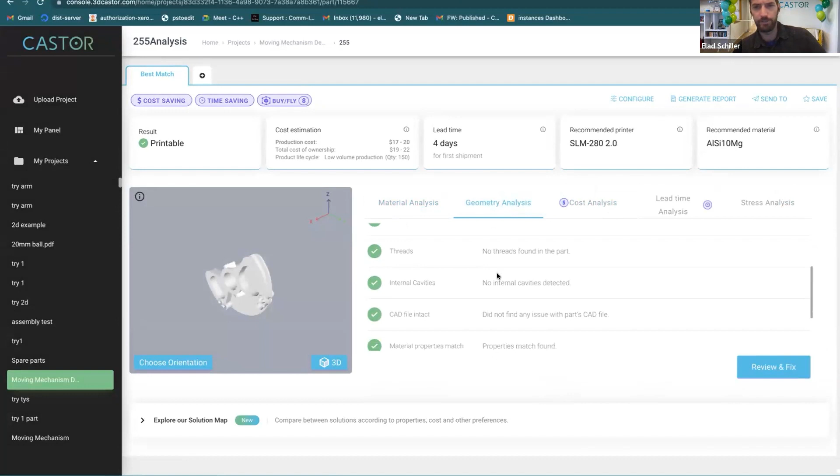This part isn't very interesting because it's printable, but let me show you a part with some issues. You can see we really have a huge range of tests we do, some of which are

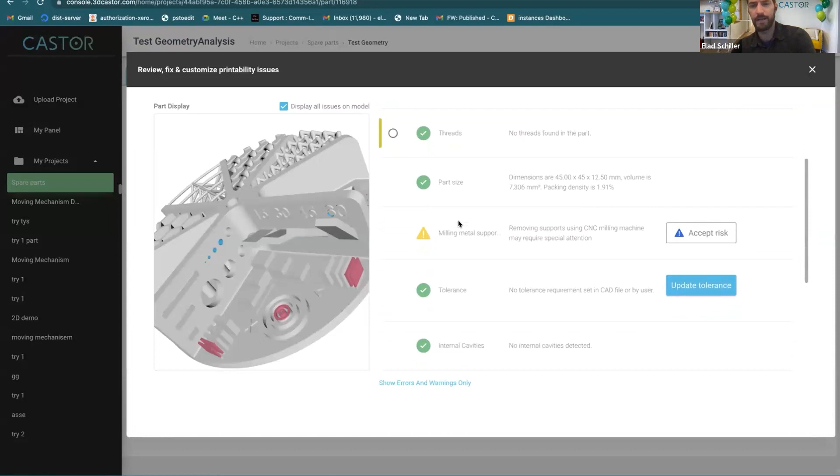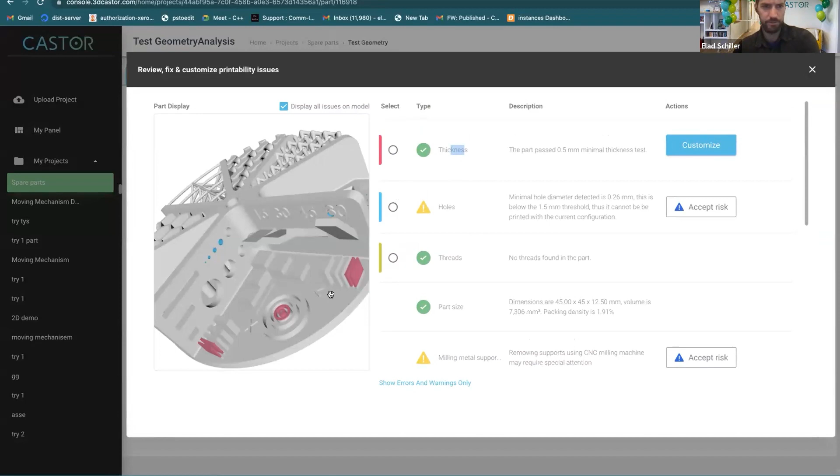basically taken from Polygonica—for instance, hole recognition, thread recognition, etc. But I'd say the great majority are proprietary algorithms of Castor, where we use Polygonica as the input for us. It's a great shortcut. For example, the wall thickness isn't the one Polygonica supplies by default—we also have an aspect ratio functionality built into it, but it was a great shortcut for us and very reliable.

And obviously, if we have any problems, we can use the Polygonica mesh healing feature to get a new STL. So this is another area where we heavily use the tools.

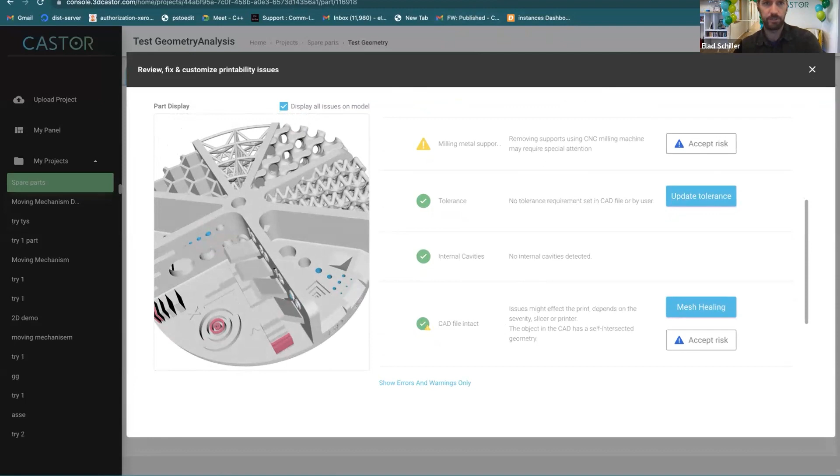Next we go to a cost analysis, where we find the break-even point between traditional and additive manufacturing. Our costing model is very robust, but without going into too much detail, both for traditional and for additive, we have various algorithms that Polygonica helps us solve.

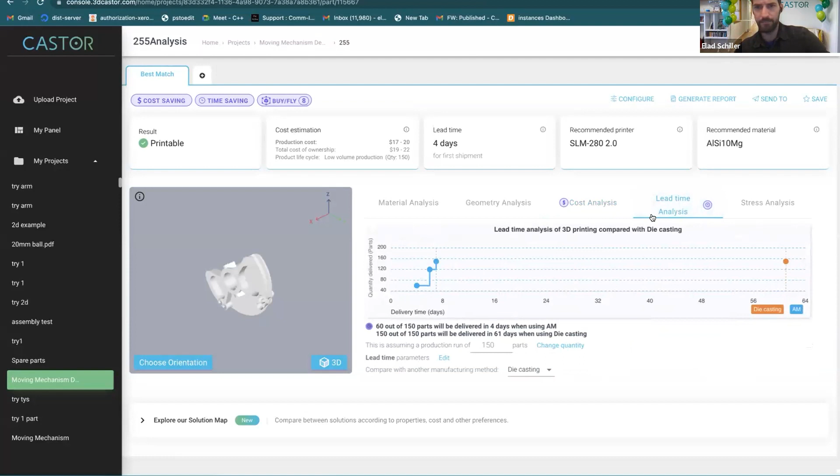Then we go to lead time—a similar analysis applies there. And finally, we have an anisotropic material stress analysis to give an initial indication of whether this is a good candidate for 3D printing or not.

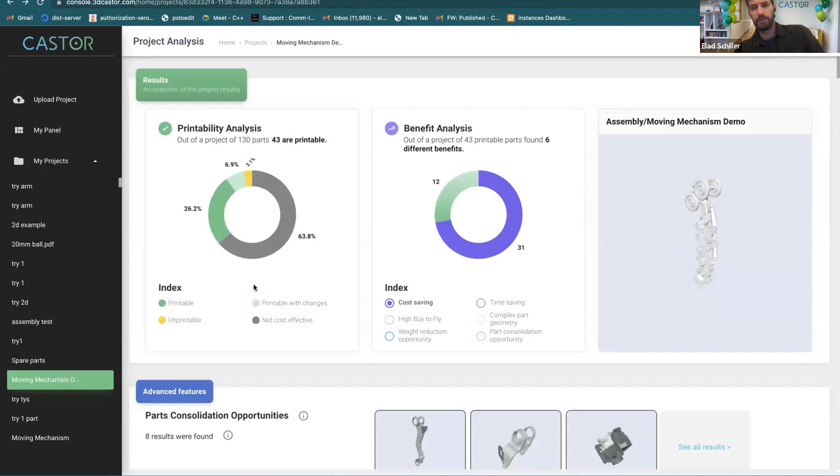The last thing I'd like to show on this page is that often our customers, especially in certain industries like aerospace, are interested not in what can be 3D printed as is, but where you'd get the most benefit from redesigning for additive. So the first example is our patented algorithm called part consolidation.

In it, what we do is look at an assembly as a whole, and look for those parts that are manufactured separately—probably because they're designed for different manufacturing methods—but with AM, you could print them as one single part.

This is the algorithm we used with HP in the example I showed you before. And again, this is another example of an algorithm that would not be possible without TechSoft's help.

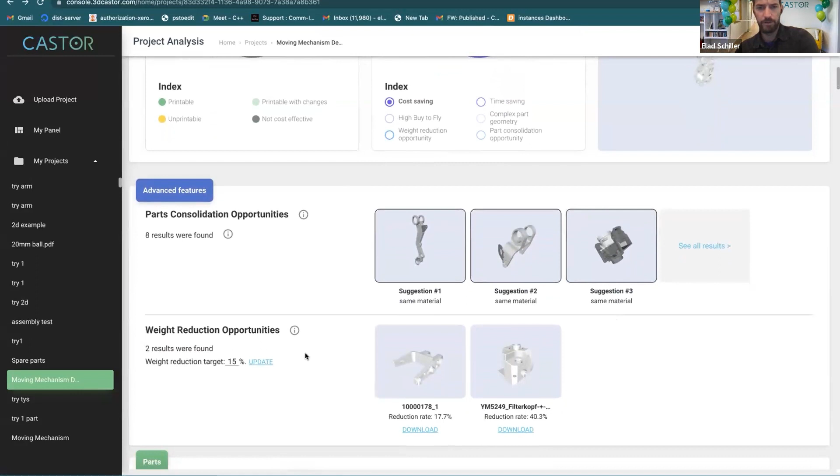And finally, weight reduction. There are many companies out there much better at generative design than we are, but what's unique to us is that we're able to scan thousands of parts and find those bulky parts where you'd get the most value from redesigning.

I think this is novel because there isn't really a data-driven approach to choosing these parts, and sometimes we're working with huge machines, where a mistake in this decision could reduce the impact from something small to something that can be a game changer for whatever you're trying to build.

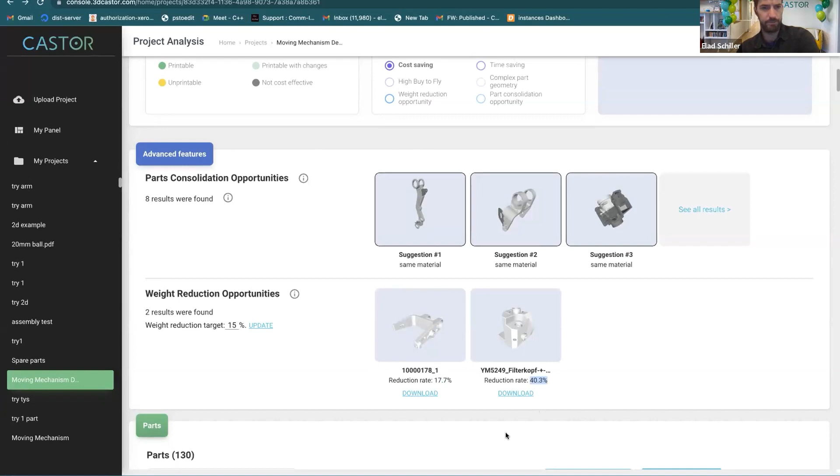So that is my quick demo. I'd be very happy to answer questions.